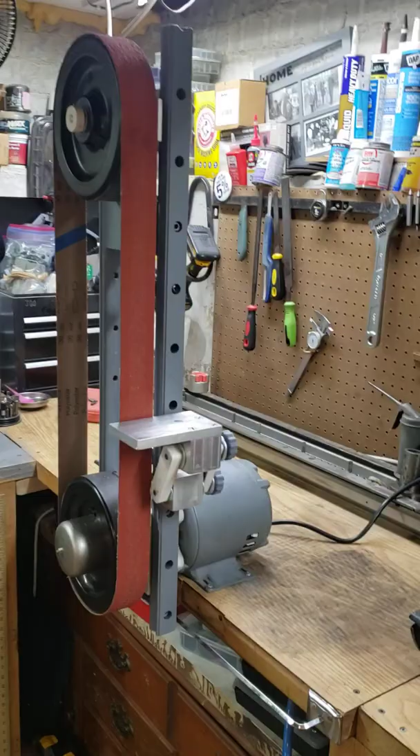Hey guys, this is a video showing off my recent project, which is this 72-inch belt sander. A friend wanted one of these, and I had some materials that I thought might make an interesting solution to the problem, and I'm just going to show everybody how I designed it.

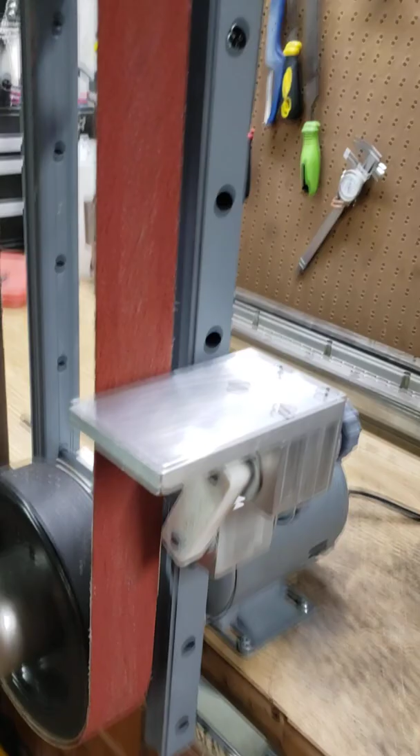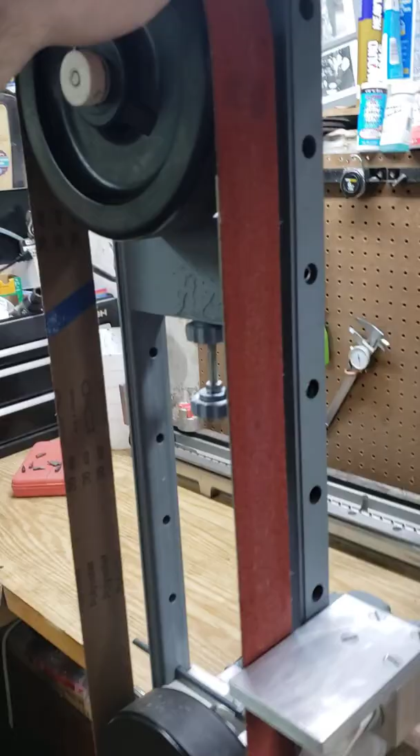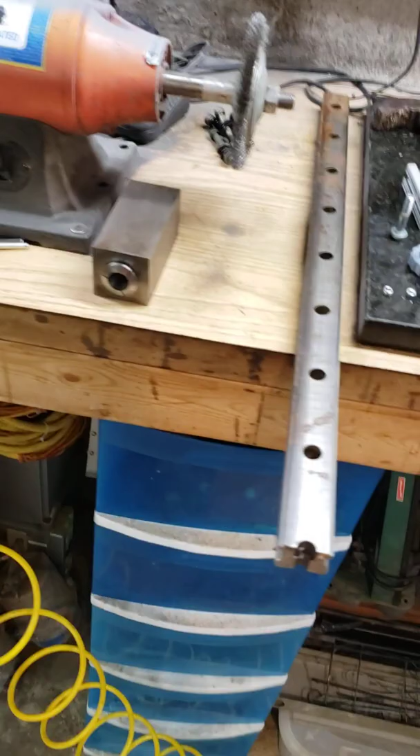So we only have two pulleys instead of the several that I've seen on other ones, but that is mainly because of the decision to use these Hiwin linear rails as the main body of the sander. The reason I use these is because I had some old ones that were given to me.

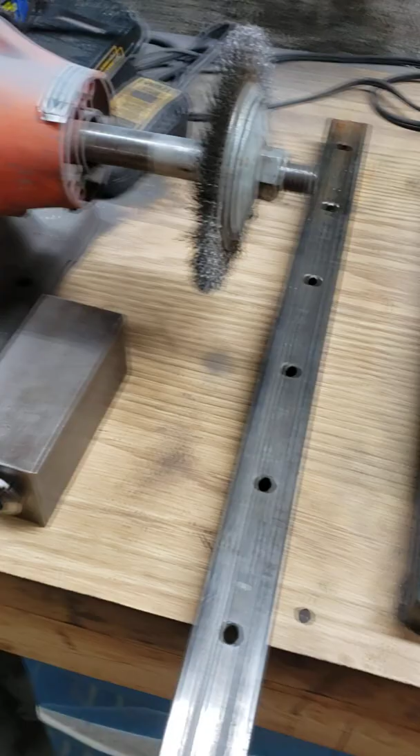The raceways of them are pitted and it's unusable for its original application, but they are still pretty beefy, and the underneath side is still a precision surface even if there's grease on it, so that allows the parts that are mounted on the sander to slide up and down, like for example, the tool rest.

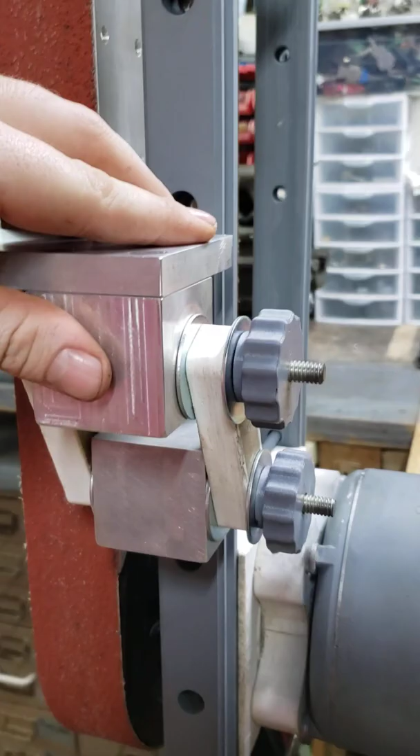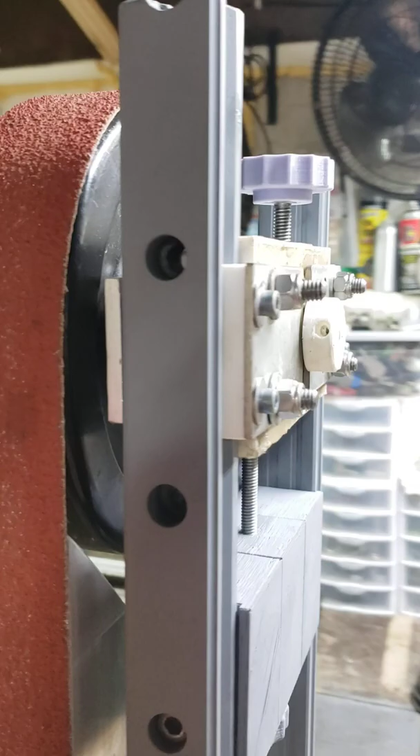I can loosen it and slide it wherever I want it on the sander, and the idler pulley rests or is coupled to this block here, which is free to slide up and down the length of the rails.

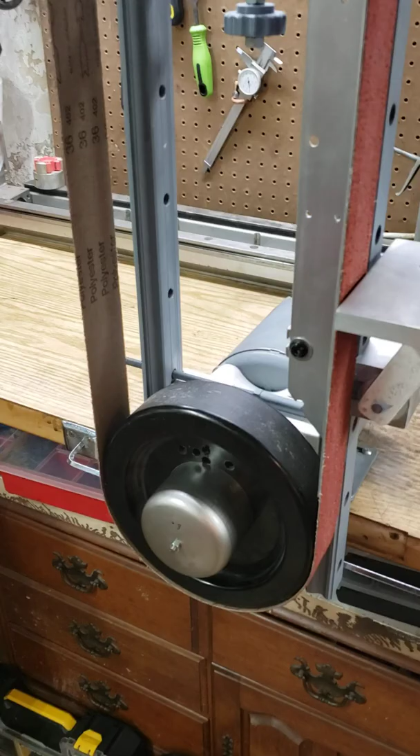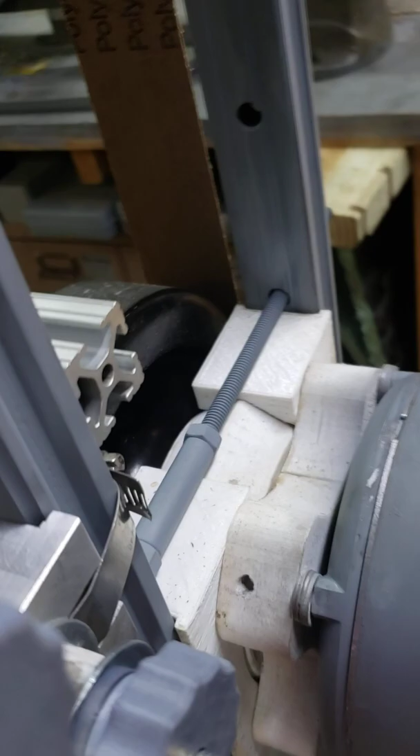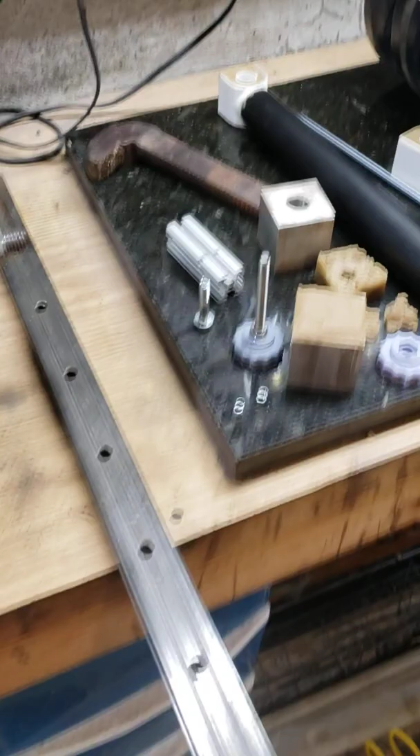The way that the rails attach to the motor is via a 3D printed coupling, and normally 3D printed parts would not be strong enough for this, in my opinion, but I used a technique where you 3D print a hollow object and fill it in with epoxy granite, which is just

sand mixed with epoxy. And this is supposed to be some sort of super material; a lot of CNC machines are made out of it for its dampening characteristics. It gets rid of vibrations, which is, I would think, pretty awesome in this application.

But the way that the rails attach to the motor is with a clamping type mechanism. You can't really see it right now because the pulley's in the way. Let's see, you can almost kind of see it. But here's a printed view of the CAD model.

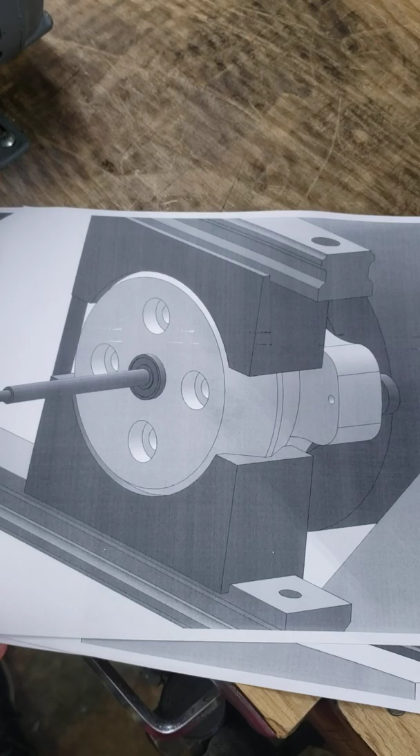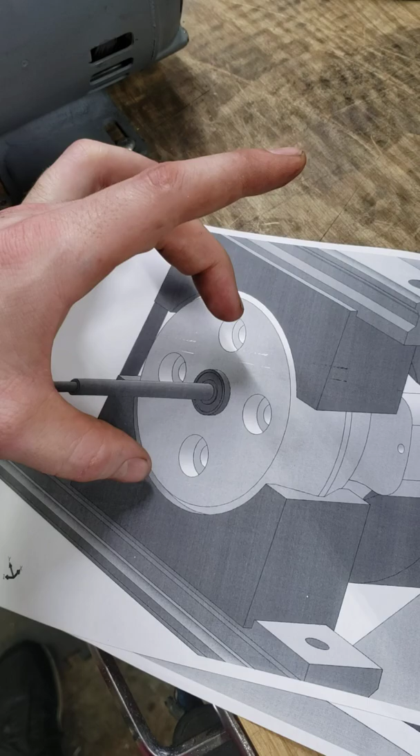Just behind the pulley, invisible here, there's a 608 radial bearing that's recessed inside of this 3D printed part, and this 3D printed part has these two clamshells that pinch down on it, and it allows you to rotate the entire assembly down to a horizontal position if you wished.

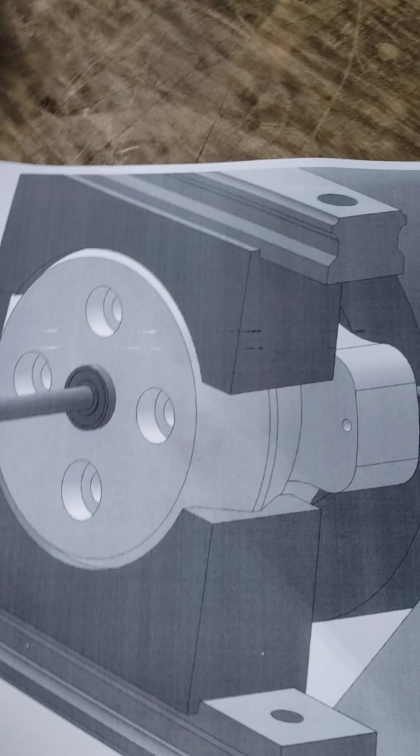And these 3D printed parts have little lips to keep them aligned with the rails. You can see there. And then underneath of that, this is the rotating part that I just discussed, and underneath of that there is a cloverleaf type shaped standoff.

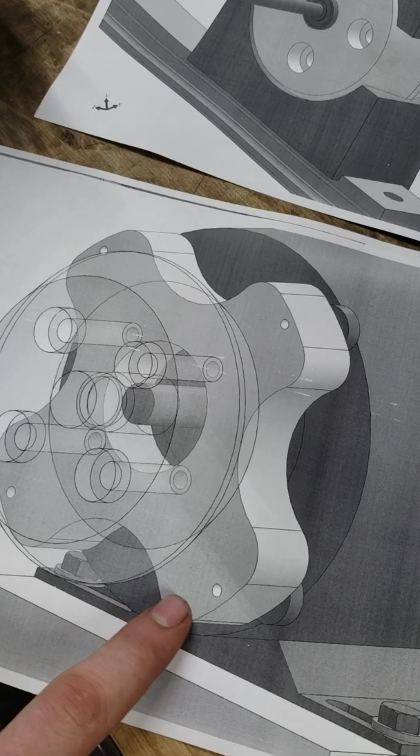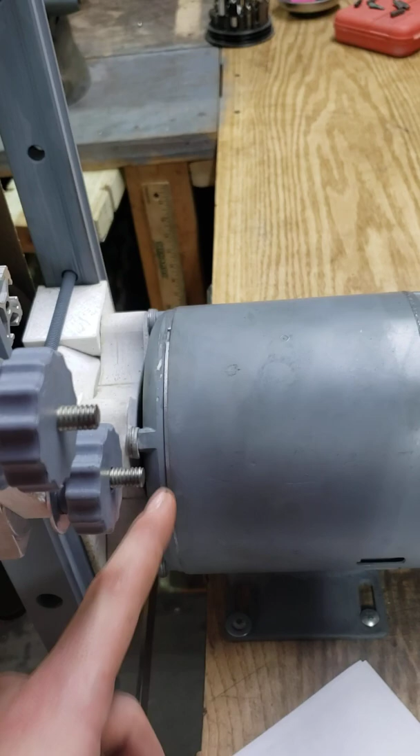This motor has 4 through bolts, 1, 2, 3, and then 4 down there, but they go all the way through the motor and stick out in the front with a decent amount of thread that I thought I could utilize to screw into this standoff. And this is also manufactured with the hollow 3D printed parts filled with epoxy granite.

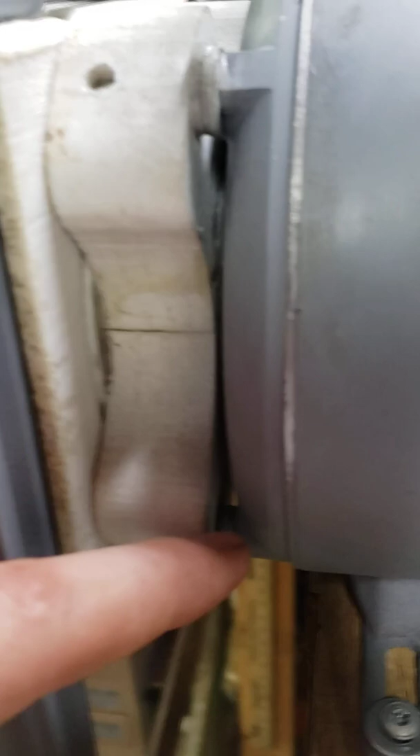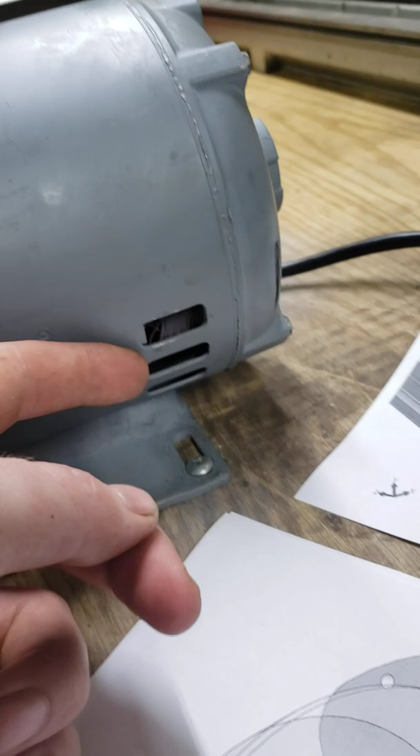This cloverleaf is stood off from the motor itself with these washers to allow air to enter the air intake of the motor, and the exit of that cooling air is also unobstructed. So that's how the rails mount to the motor.

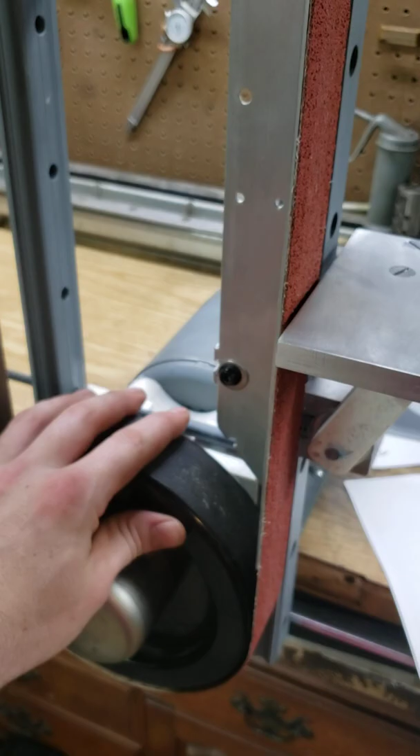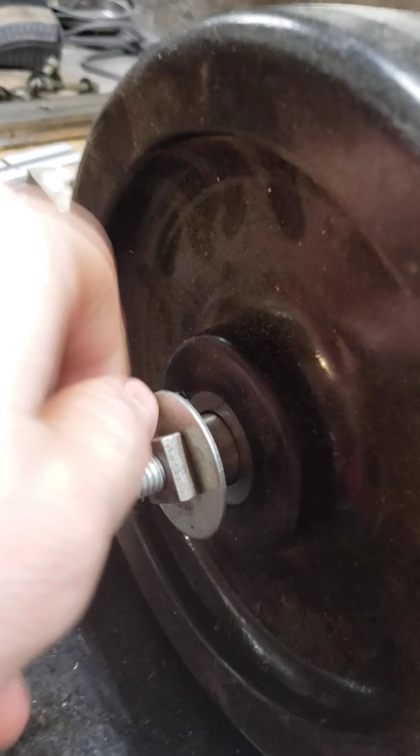The pulleys themselves I made from these caster wheels that I had. They originally had some bearings inside of there, but I pressed them out and slapped them in my lathe over here, and you can see that I've turned down the outer surface. I don't know if that was necessary or not, but it helped.

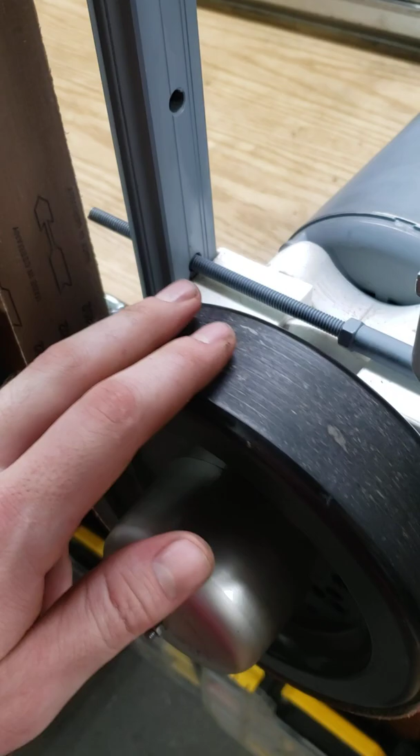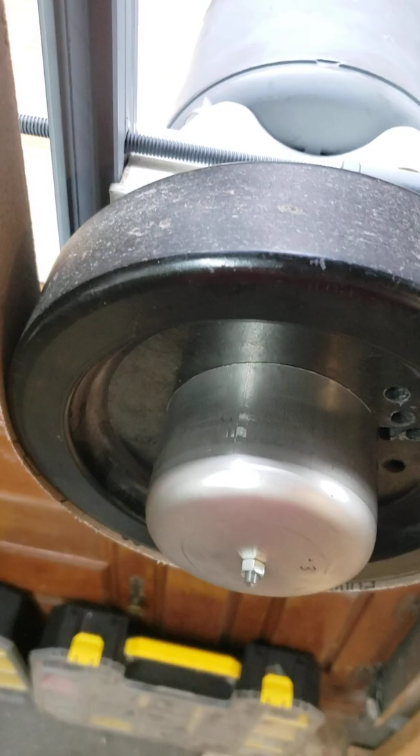I wasn't sure how consistent the molding on those rubber wheels was, and I didn't want to have any vibrations due to that, so I'm pretty happy with it, and the belt seems to ride really well on it.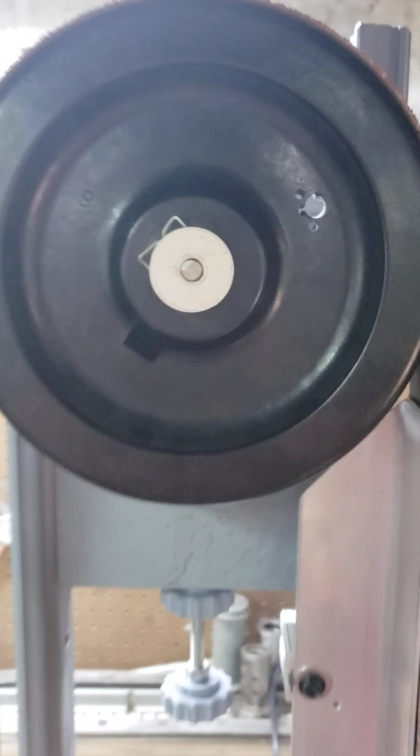Both of these wheels I balanced on my surface plate, and you can see the holes that I've drilled through them to take away weight in the areas I didn't want it. So underneath of here, I shall take that off real quick.

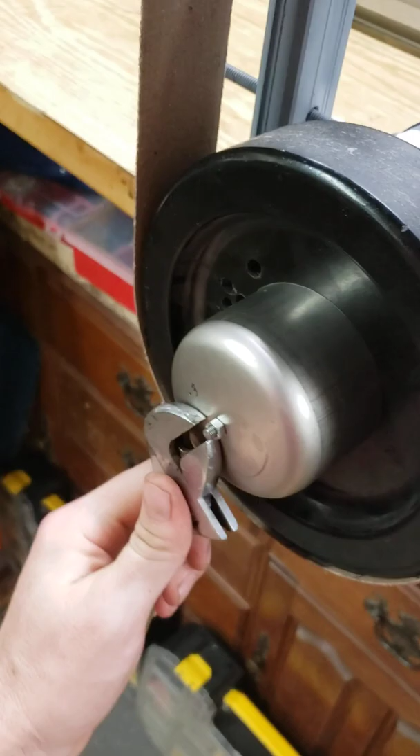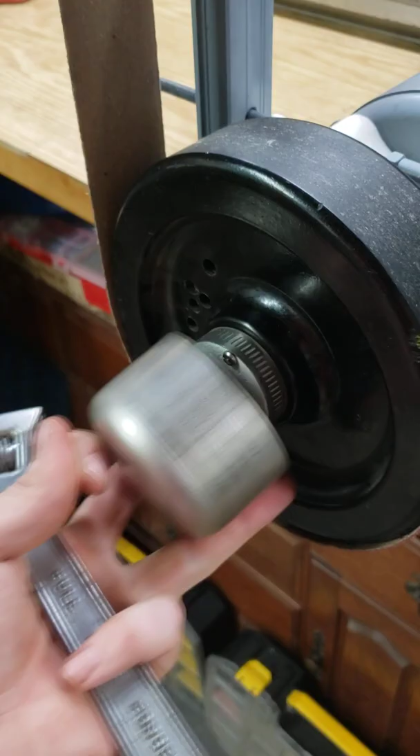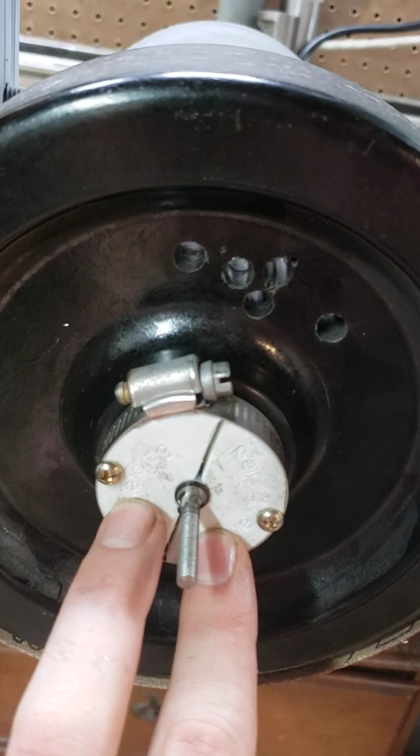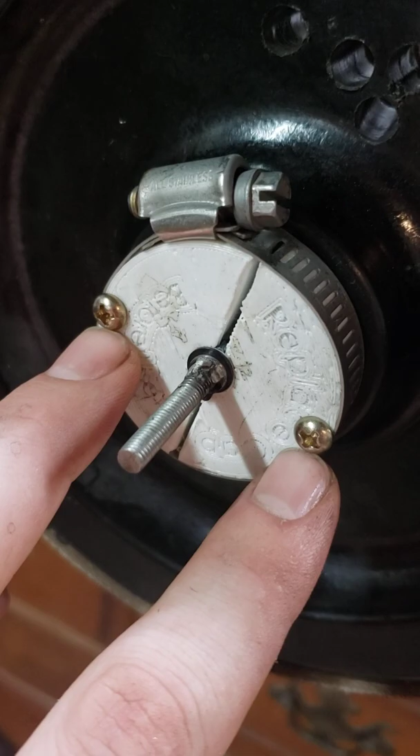So this is the mechanism that attaches the drive shaft with the drive pulley. These are two 3D printed wedge-type shaft collars that extend into the pulley itself, and then this hose clamp is used to pull them together and grab a hold of this drive shaft. And then there are two screws here that go through this shaft collar and directly into the rubber, making sure that nothing slips.

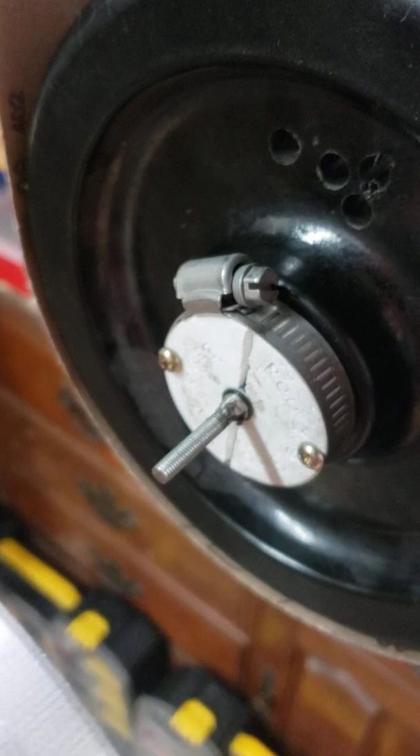And because this thing rotates pretty quickly, I didn't want to have that hose clamp exposed, so I just took this little piece of scrap metal that I had, and voila.

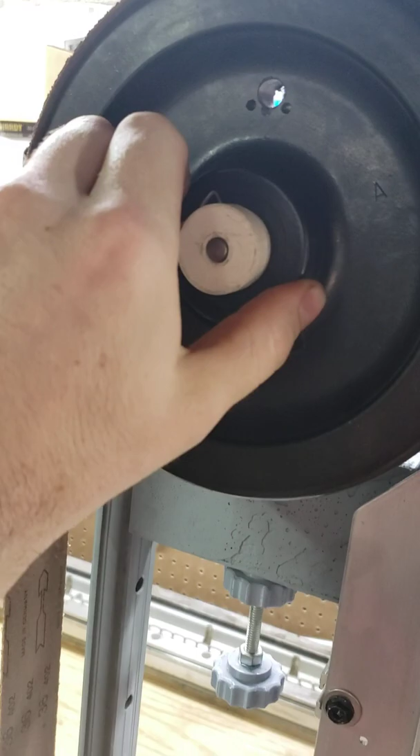Okay, so let's talk about the idler pulley. This wheel is also balanced. You can see the holes. The shaft in this case is stationary.

That was my pulley falling off, don't worry about that.

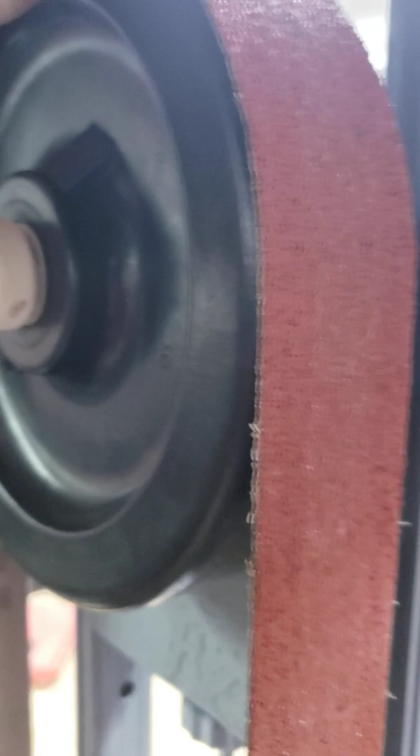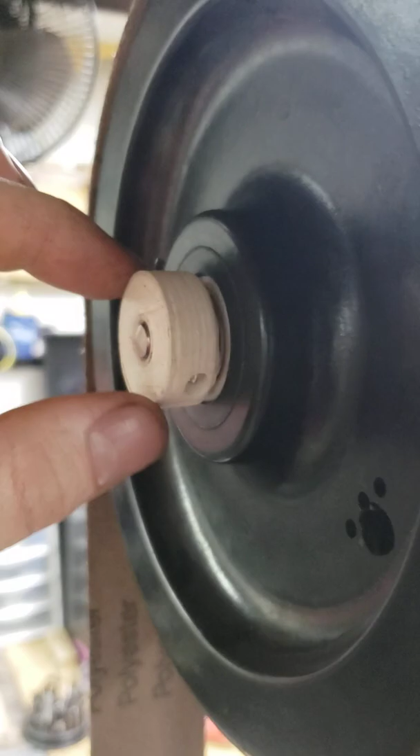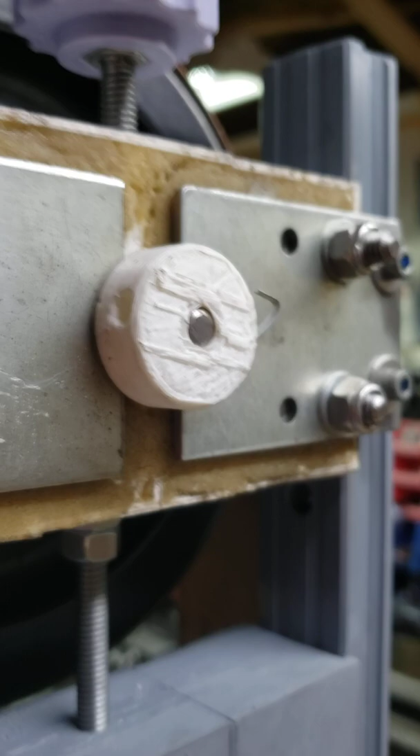There is a pair of 608 bearings inside of the through hole of this pulley, and this end cap is 3D printed, and it has a cotter pin to prevent it from coming off. And on the other side, there's the same 3D printed part. I need to clean that up, but there's a cotter pin as well to hold that on in the back.

Now, the tensioning and tracking mechanisms are back here. The tracking is accomplished with this knob. You tighten it or loosen it, and a threaded rod extends down through this, yet again, epoxy granite with 3D printed part. There's a threaded rod that goes down and pushes down on the axle of this idler pulley. And obviously you can see how that would accomplish the tracking.

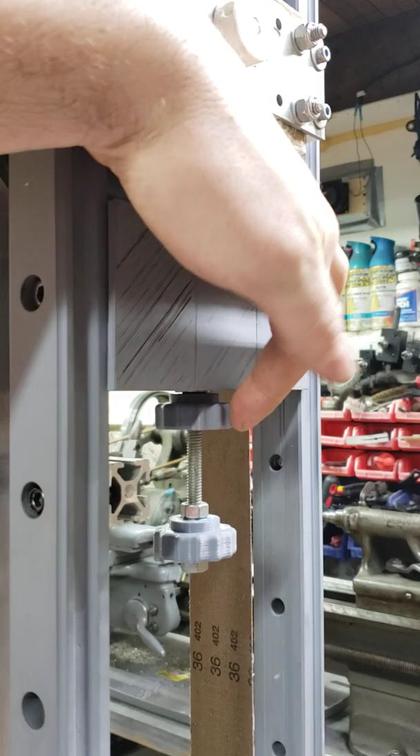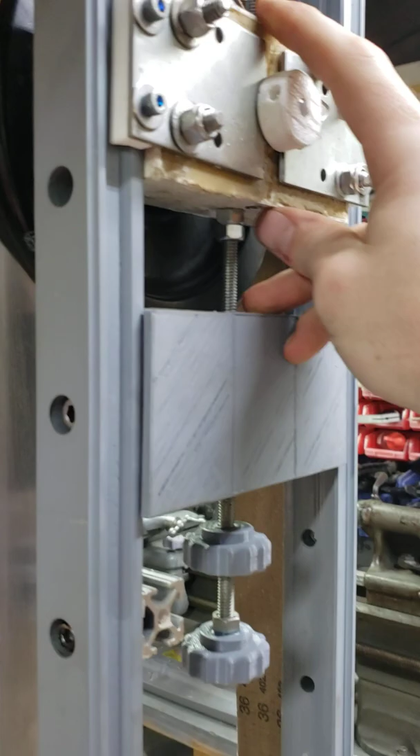The tensioning is accomplished with this 3D printed epoxy granite part that is bolted into the rails and fixed in place in that manner. And it has a locking knob, and when you loosen that lock knob, you can then twist that, and it relieves the tension on this block, which is then free to slide up and down.

This idler block assembly, I had to go a little bit off design to get this working, but I really like what I ended up with. It's two metal plates, just scrap pieces that I had, and on the inner side they are secured to the block with these lock nuts, and you can loosen these to adjust the tension of this gib.

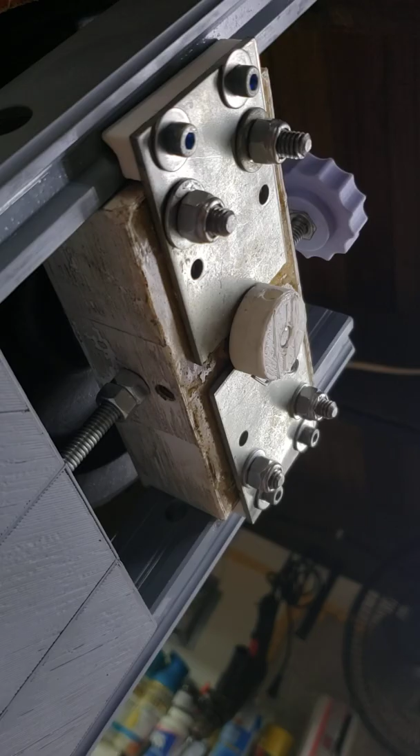It's a 3D printed gib that takes the contour of the inner race of the linear rail, and so you tighten these until this is pressing up against this just enough, and it keeps everything moving in a nice linear manner. Let's see.

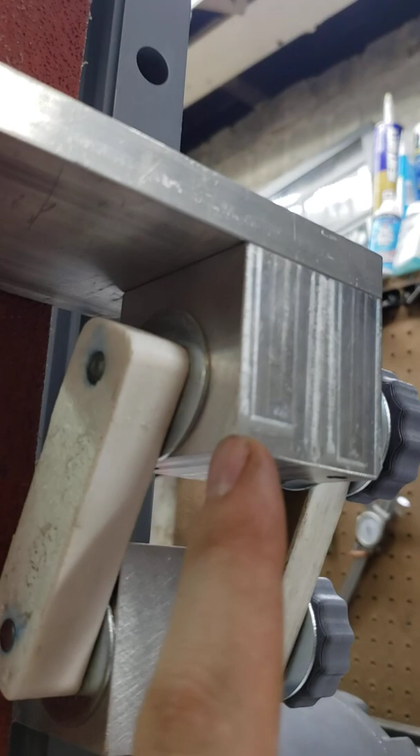The next thing is the tool rest. This is a piece of 1/2 inch thick aluminum bar stock that I machined to attach to this piece of aluminum stock. There's a through hole that goes through there. Actually, the rotational part of the tool rest was made from these pieces. I have a ton of these laying around that I got in an auction.

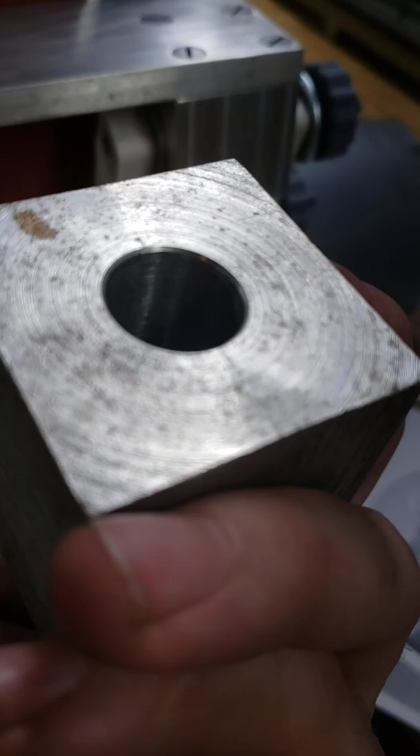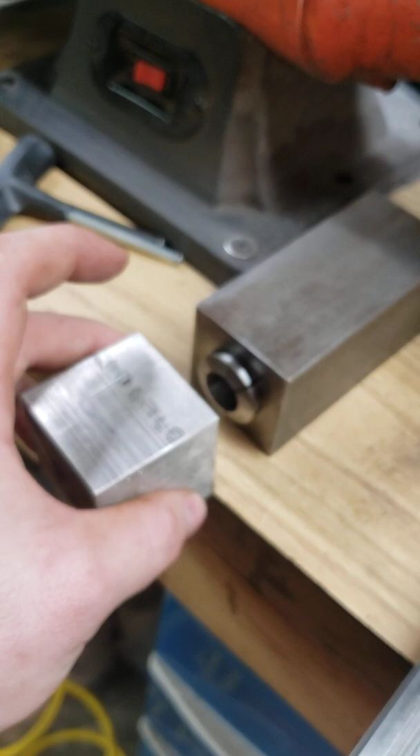They seem to have a through hole and a single machined side, and all of the other surfaces seem to be rough sawn. So what I did was I took them and press fit a piece of round stock into that hole, and used that round stock with my collet block and lined this up so that it was rotationally parallel with all these faces.

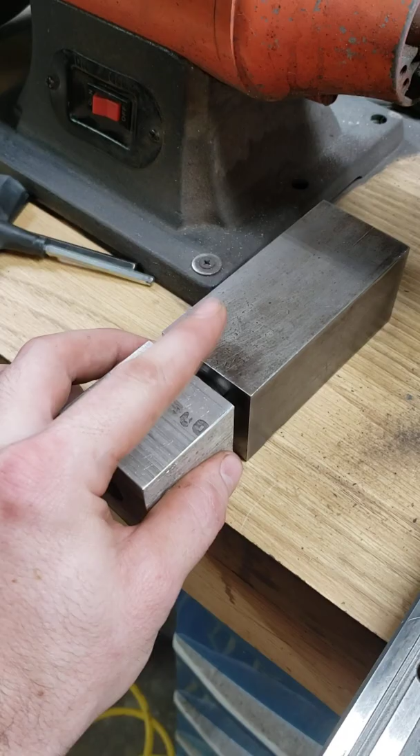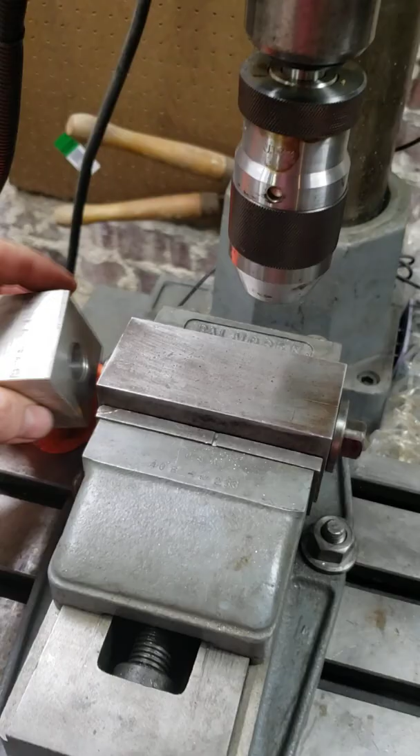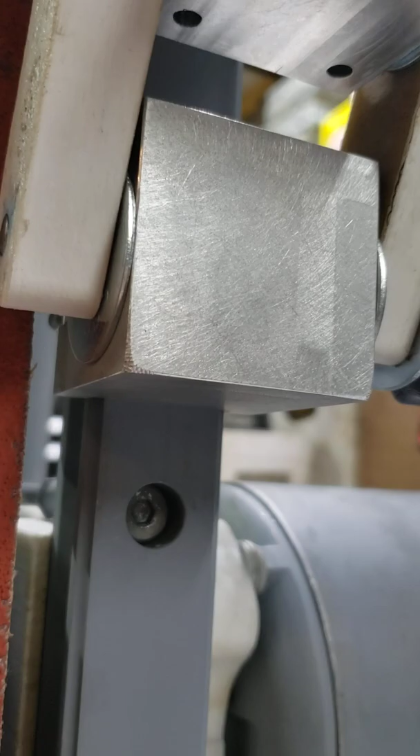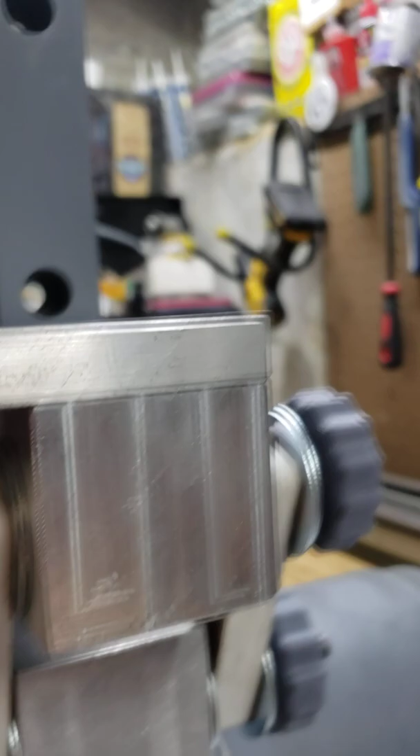And I stuck this entire thing into my milling machine and just cleaned up all of those rough sawn surfaces, and you can see all the machining marks on there. This one I kind of tried to sand up a bit, but I'm really happy with how they turned out. The arms of this tool rest are yet again 3D printed with epoxy granite infill. And here's a good view of how that looks.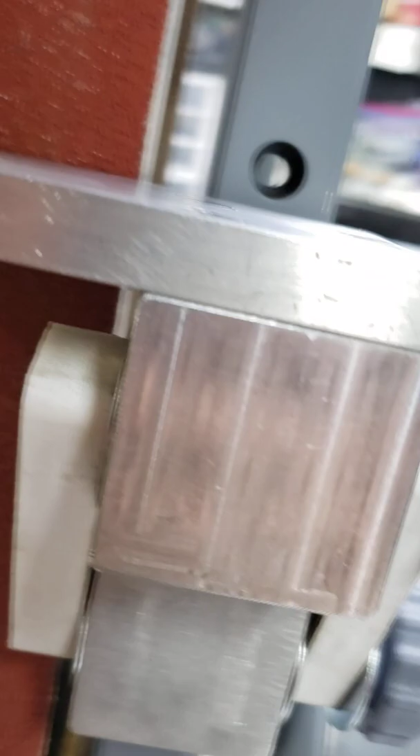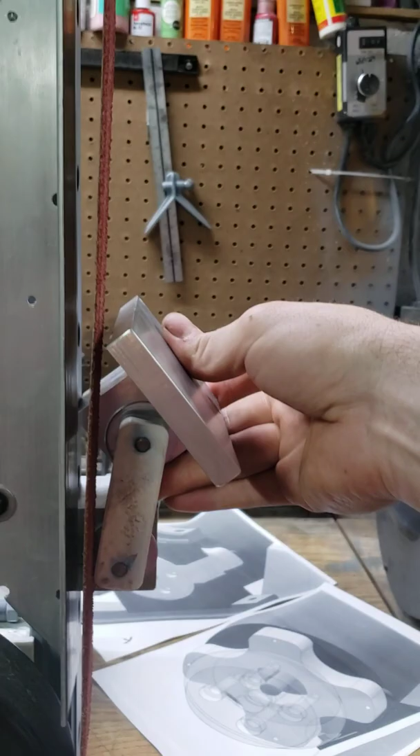The way this works is you loosen both of these knobs and the entire assembly becomes slack, and you can adjust it to whatever angle you want using whatever measuring tool you have. And once you have it where you want it, you lock both in place.

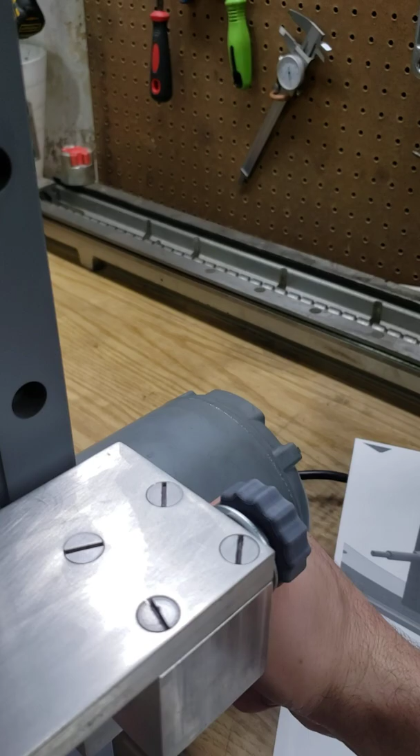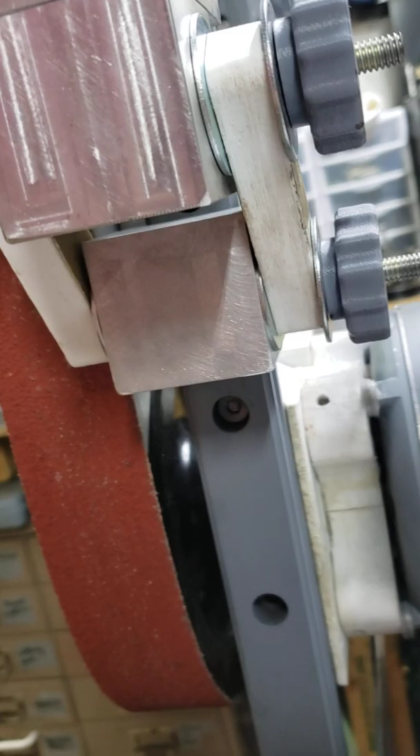And this is extremely solid once you get those cranked down. There are some washers to distribute the force and increase the clamping. And I got some Loctite in those holes to prevent that from ever rotating.

And let's see. Yeah, I'm definitely going to do some editing with this.